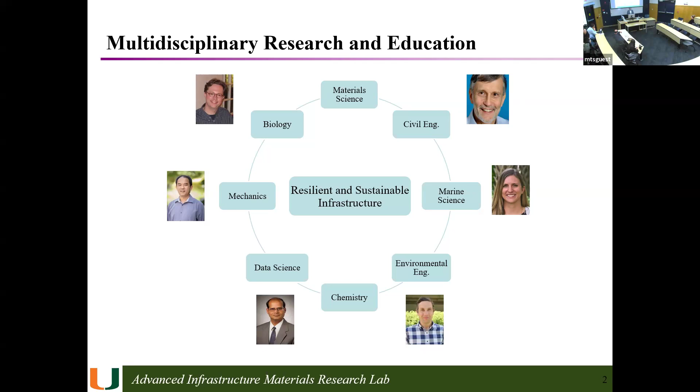So I collaborate with a wide range of folks. I am an engineer by training, but I collaborate with biology folks, mechanics, data sciences, chemistry, marine sciences, environmental sciences, and I believe that's the only way we can address the issue of resilience and sustainability in our infrastructure. Engineering is just one part of that equation. So we need to bring in marine scientists, biologists, environmental ecology, and different types of disciplines.

So in order to give an overview of what we do, the first research area for us is related to bio-inspired self-healing infrastructure materials. In particular, here we are looking at cement or concrete-based materials.

US infrastructure keeps getting a grade of D plus and C minus. Either one is horrible, right? C plus, C minus, D plus, so we need to do something about that. This is an example of a lot of problems that we have in our infrastructure. So we need to do something about that.

And one way we want to do that is to get inspiration from nature, because nature does things in a very interesting and optimal fashion.

To give you just one example, here you see an image of a sea urchin. This is a material consisting of calcium carbonate - limestone. Limestone is very brittle, but this creature is able to have very flexible spines, still made of limestone. You cannot think of limestone that you can bend - it cracks.

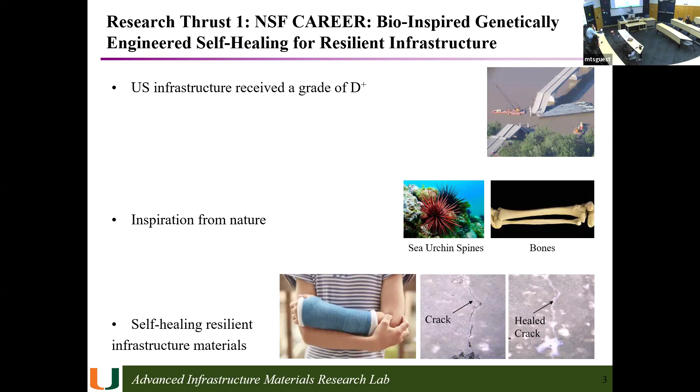Because you don't need to have traffic jams, you don't need to shut down highways to fix concrete. More importantly, whatever you can see to fix are only the cracks that you see on the surface. Most of the cracks are not on the surface, they are well within the material and you don't see them. So what happened up there was not an external crack that you would be able to see and fix, it was caused by an internal crack that you're not going to be able to see. But if you have a self-healing mechanism, you're able to heal the material and hopefully prevent disasters like that. So this self-healing is key to improving the resilience of our infrastructure.

The research thrust two has to do with combining data sciences and machine learning, and also bioinformatics, to improve the resilience and sustainability of our infrastructure materials. The idea here is to take some of the biomolecules that we find in nature and try to see how they can improve certain functionality. Sometimes you want to improve strength, sometimes resilience, sometimes other properties.

This scheme is a machine learning scheme, and I know everyone by now is familiar with machine learning, a new buzzword in this day and age. But this is something that pharmaceutical companies have been using for 30, 40 years. This is how they make new drug discoveries. They have a large data set of different biomolecules that they extract from nature. These are not lab synthesized biomolecules.

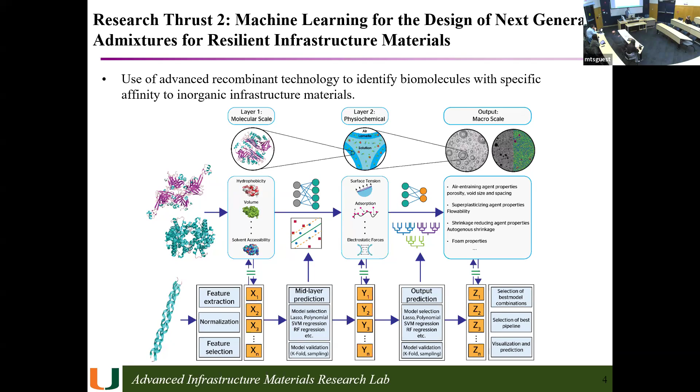These are all derived from nature. And they try to make connections between the molecular structure of these biomolecules and try to see if there is any correlation between the molecular structure and the property of these enhanced infrastructure materials. That's another research thrust my group is working on, and we have made some progress. There are a lot of challenges, and the major one is just the limited size of the data sets that we have. You cannot use machine learning if your data set is small. So we're working on that.

The third research thrust for us has to do with using more sustainable infrastructure materials. Construction processes and infrastructure materials are responsible for one third of the entire CO2 emissions, period. A lot of people do not know how damaging concrete infrastructure is for the environment. One third is huge, right? So we need to do something about that.

Producing 1 ton of cement, only cement, I'm not talking about concrete or other things, releases 1 ton of CO2 into the environment. It takes a lot of energy, it releases a lot of CO2. So we need to do something about that. Even if you can change only 5% of concrete somehow, that will translate into huge benefits because of the sheer volume of infrastructure material we use.

The estimates are that we will continue to use concrete in our infrastructure. There's no other way, you're going to use them. So what we are doing in my lab is to be able to use low carbon and green alternatives to concrete. Some of the alternative materials we are using are naturally occurring, for example calcium silicates that you can find in different locations from geological resources.

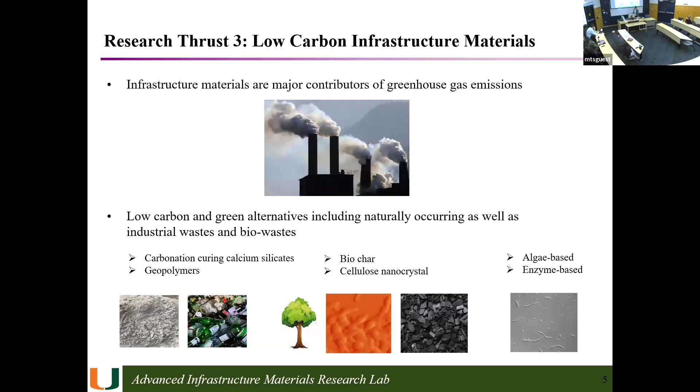Particularly, we are very interested in biochar because every day we see some new aspects of biochar that we haven't looked at before, and how it can benefit the infrastructure to improve the sustainability of our infrastructure.

So I sort of went over this, but just to go over it one more time: concrete, we've used that in a wide range of infrastructure. We use that in transportation systems, in buildings, in dams. We use that in our coastal infrastructure. We use that in our nuclear plants. We use that in marine structures. So it's basically everywhere. But one issue with concrete is that it is prone to crack. It cracks easily, so we need to find ways to improve its crack resistance.

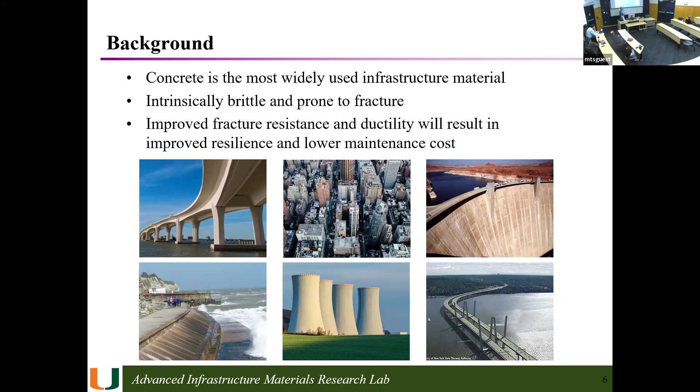Also, there are new technologies where 3D printing and other robotic applications are used to improve concrete construction. But in all these cases, structural integrity plays a very important role.

And also, there are some innovative ideas to use it as a battery, to use concrete as a battery, because in concrete you have a lot of ions. So it can, in theory, serve as a battery. There is some proof of concept work showing there is a possibility for that, but I think it is far away from implementation. In theory, though, it can be used as an energy storage medium. So if that could be a possibility, think of the benefits that it can provide. I don't know what might happen with the new administration, but in theory, this is the possibility.

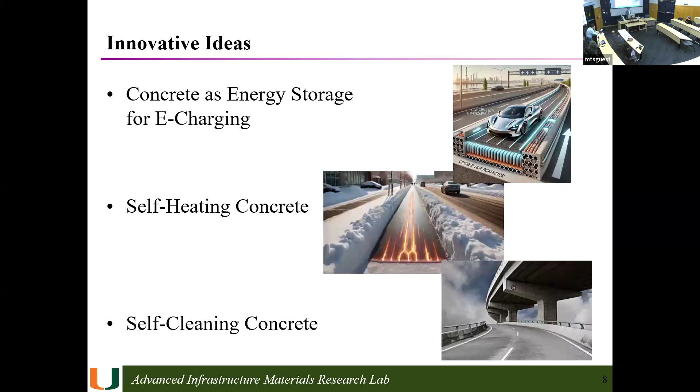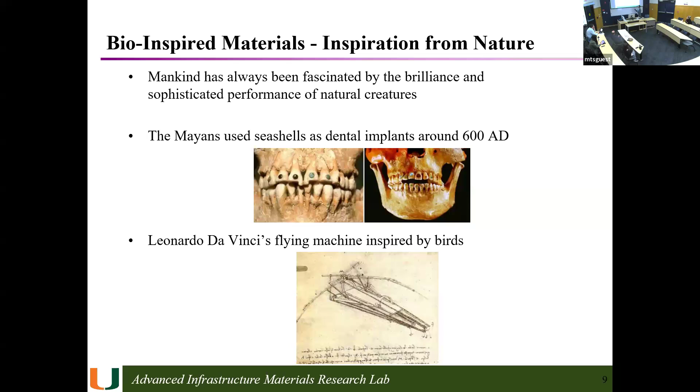So I talked about the bio-inspired approach, but this is not new. I didn't come up with bio-inspiration myself. Humans have always been fascinated by biology, by nature. Mayans used seashell as dental implants a long time ago. So there are some bio-inspired materials in our history, and Leonardo da Vinci's flying machine was inspired by birds.

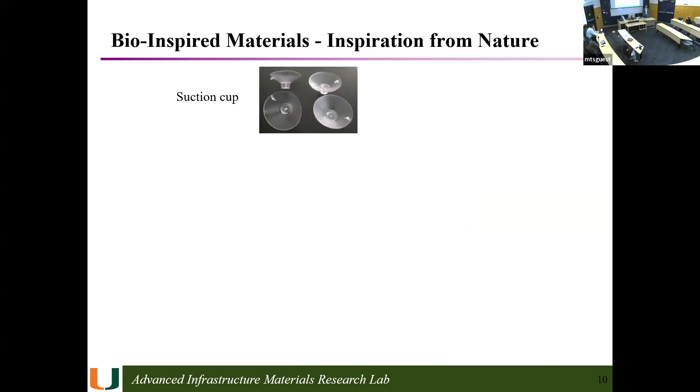What is this? A suction cup. We use that in many different applications. Do you know where the idea came from? Octopus, there you go. The idea came from someone looking at an octopus. It wasn't like one person decided, okay, next morning I'm gonna develop suction cups. No, you look at nature and see how interesting the octopus moves around. Look at the octopus cups and also the suction cup, you see a very close resemblance. So the idea comes from octopus.

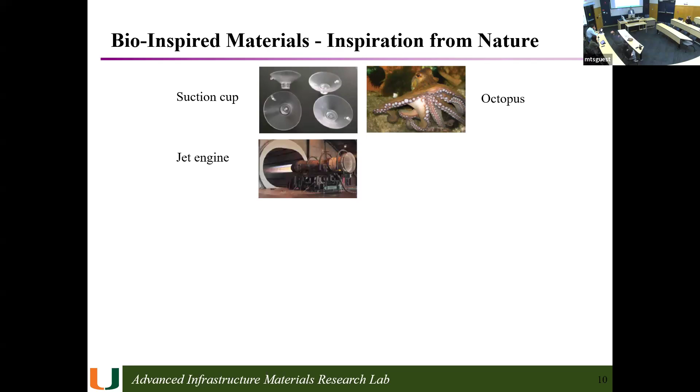So take the jet engine, for example, the way that a jellyfish moves around. People looked at that and were able to use it in the design of jet engines. Velcro, where do you think the idea comes from? Feathers.

The hook and eyes of feathers. Gecko? Seeds? No, walk across the grass - by the time you make it all the way, you'll see a lot attached to your clothes. Very good - from plants. So the idea comes from plants. Yeah, they're annoying, so you need to get them off. But Velcro, the idea comes from this - just looking at nature.

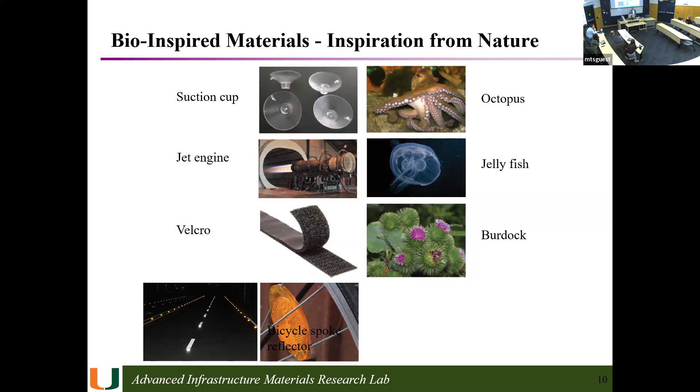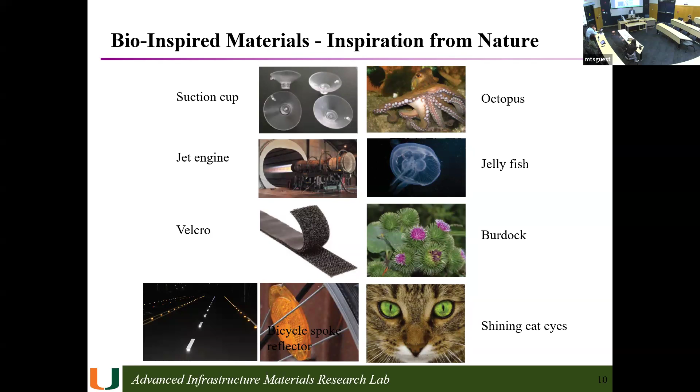So we use bio-inspiration in a wide range of applications. What I'm talking about here is not new, but I'm taking it into a new area - taking bio-inspired materials to develop hopefully more sustainable and resilient infrastructure materials. There are many examples, but just to give you a flavor and have some fun, I mentioned this before.

At the microstructure level, nacre consists of 95% highly brittle calcium carbonate, or limestone, and only 5% biomolecules - just a tiny amount. These biomolecules are able to manipulate the microstructure of the material, and that's how nacre is able to exhibit such high crack resistance, higher than steel and concrete. Obviously you need to compare mass by mass - you cannot compare different masses.

Another example I talked about earlier is the sea urchin - you can actually bend these spines. But calcium carbonate, limestone, is very brittle; you cannot bend it. Human bones are very, very tough. Your teeth are put under continuous abuse - you eat different things, chew hard, acidic, basic things. Yes, at some point you need to see a dentist, but teeth are very tough.

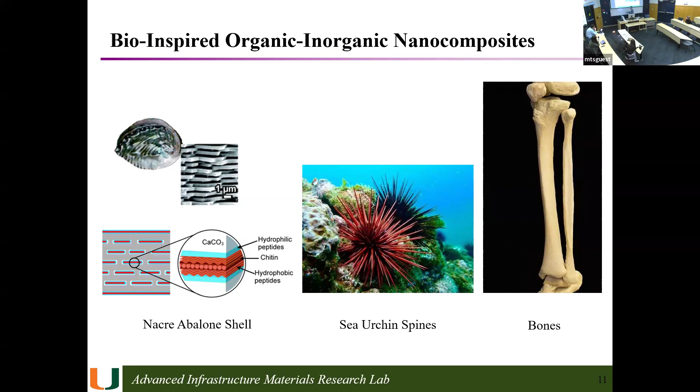This is because you have, again, a small amount of biomolecules in all these materials that are able to regulate and tune the properties of materials at the macro level. So our idea was to use these biomolecules to enhance properties in our infrastructure materials.

So we started using some amino acids. If you put them together in a linear fashion, you get peptides, and if you connect a bunch of peptides in different forms, you get proteins. Typically there are about 20 different amino acids in nature, so we decided to use different proteins that we could basically find.

Getting highly purified proteins is very expensive, so we tried to use some of the proteins we were able to get from biological waste. For example, some proteins we use are obtained from blood - hemoglobin - and we use proteins from milk and from eggs. So these are all derived from bio-waste, and in a sense, they're pretty cheap.

The self-healing idea we have is that we use certain enzymes obtained from soil, and we also provide urea and some nutrients that act as bacteria food. So we put biomolecules, certain bacteria, into concrete, and when a crack starts, they become activated and start precipitating the healing material, eventually completely filling the crack.

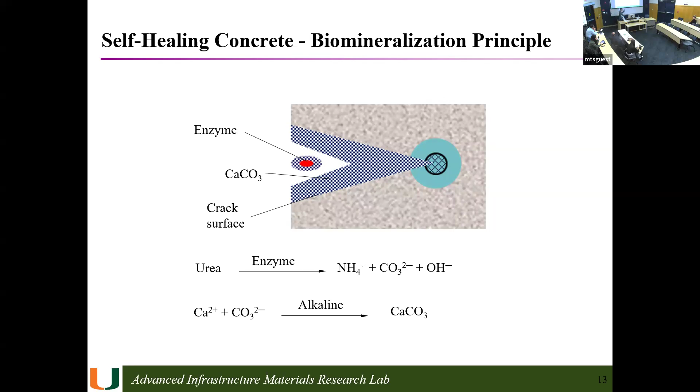So these are the proteins: lysozyme is derived from egg, albumin comes from cow milk or cow blood, and hemoglobin comes from human blood as well.

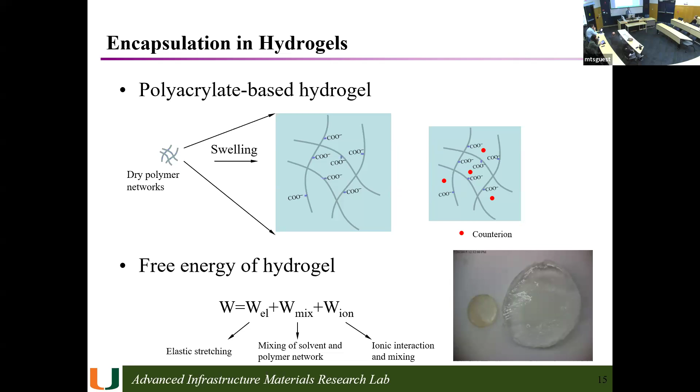So you cannot just add these things into concrete. You need to be able to encapsulate them in a certain gel. Here you use a hydrogel to encapsulate these materials, just like a capsule that you take. The capsule, the medicine that you take, the drug is not the capsule - the drug is the powder inside. The capsule just acts as a vehicle to take this into your body because you don't want that to be absorbed in your throat. You want it to go inside your body and get released where needed. So we use this to encapsulate.

This way you can improve the resilience. You don't need to worry about repairing, just healing. The ability to regain its property is the definition of resilience - it's able to regain its property after the crack occurs. So this is a self-healing infrastructure material.

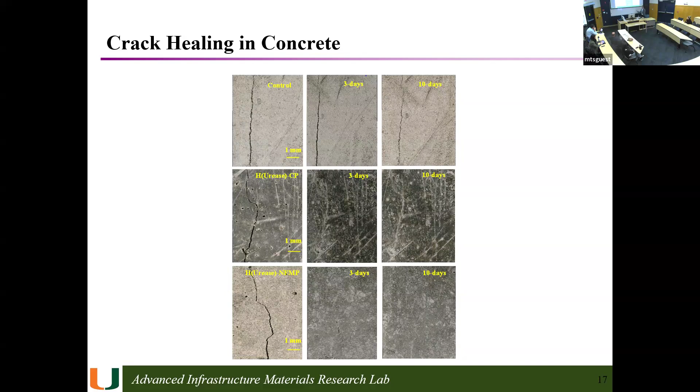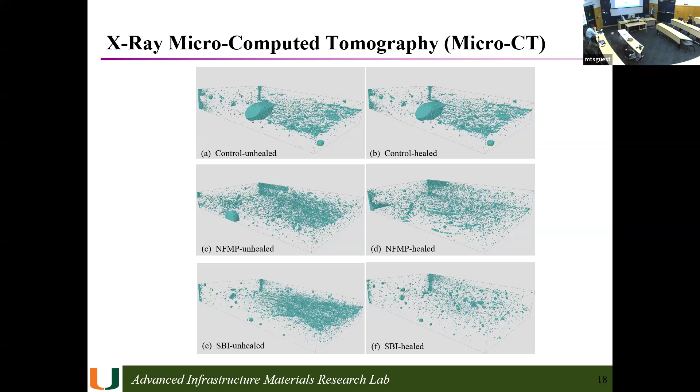We also have some fancy tools that show this better. Here we use micro CT analysis. A micro CT is just like the CT scan you get at a hospital - it provides the internal structure of different parts. This is a high energy CT scan that we use to look at the interior of materials. Our CT scan also confirmed that the cracks were filled.

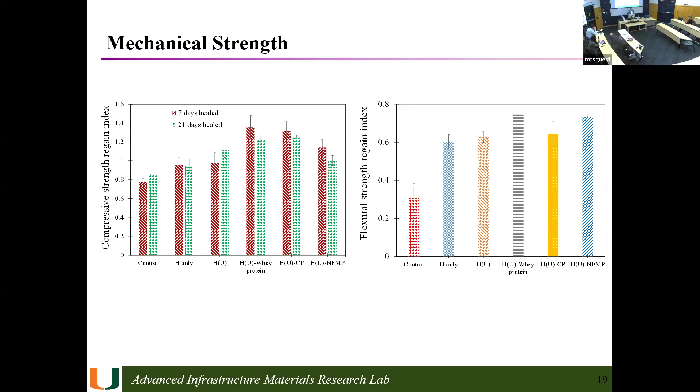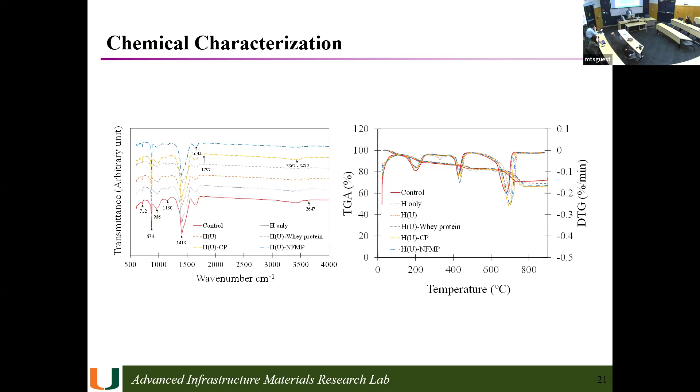Elemental analysis. Now I'm going to talk about some of the low carbon materials that we use in concrete. So the first thing I talked about had to do with self-healing; now I'm going to talk about some of the results we have in relation to low carbon sustainable materials.

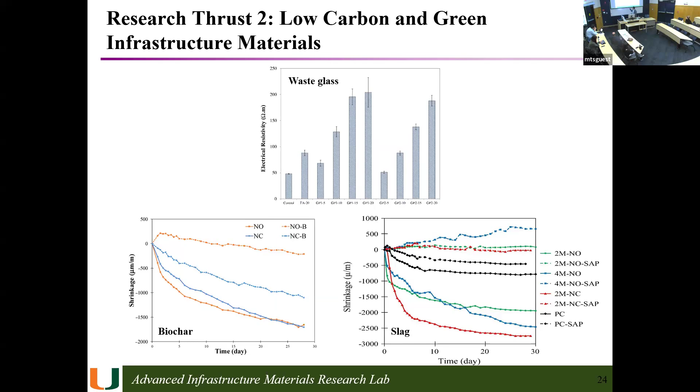When we use waste glass, we were able to show that it improves the durability of our infrastructure. Use of biochar improves the longevity of our infrastructure material and prevents cracking. Here we use slag, a byproduct of steel manufacturing. They produce a lot of slag that is just out there, and typically it gets dumped into landfills. But nowadays all our landfills are maxing out, so they don't have capacity to take more. So we use slag in cement - it's just a byproduct, a waste that you're able to recycle and reuse in concrete.

Another benefit we get from using concrete is as a carbon sequestration process - we capture CO2 that gets emitted into the environment, and this way we act as a carbon capture tool. The way it works is you have a reactant, in this case calcium silicate. You add CO2 to it, and what you get is a type of concrete - not traditional concrete, but one with very high durability and strength. This process is able to sequester a large volume of CO2.

So basically now we are turning a material that is highly polluting, highly energy intensive, into a material with much lower carbon footprint and one that is able to act as a carbon capture tool. What we hope we can do here is turn the tables, and help the environment and our infrastructure by using a material that is more sustainable. So it acts as a carbon sequestration material.

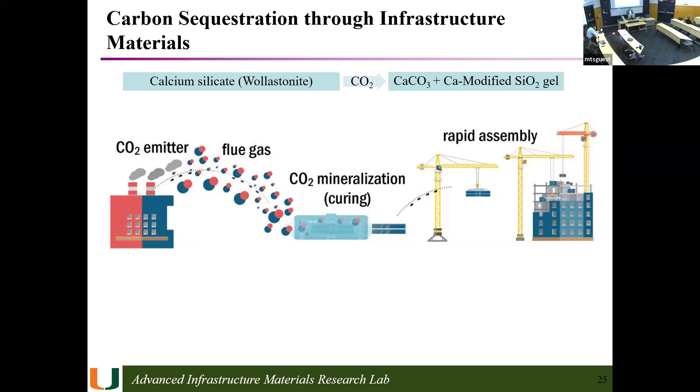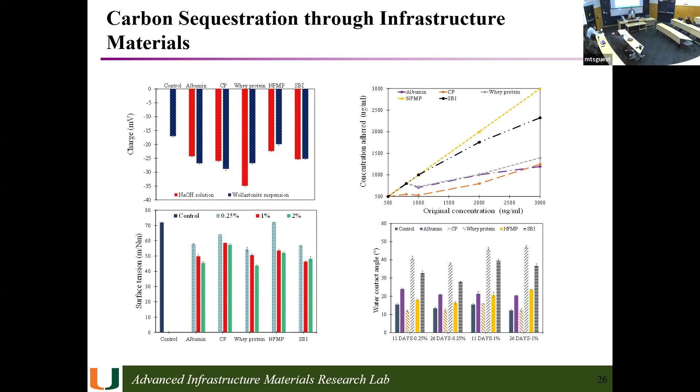Again, these are some of the details, the chemistry - I'm not going to bore you with that. We looked at different charges, the potential, their adsorption ability, the water contact, the hydrophobicity, and things like that. Some extraordinary processes, some microstructure analysis. To me, this is the most interesting slide. So we use some biomolecules in this process.

We were not planning on doing that, but we said, why not? Let's just see what happens.

SBI - so the first time we got this, I was very suspicious. This just cannot be, let's run it again. We ran it again, my PhD student ran this again, and then we got the same set of results.

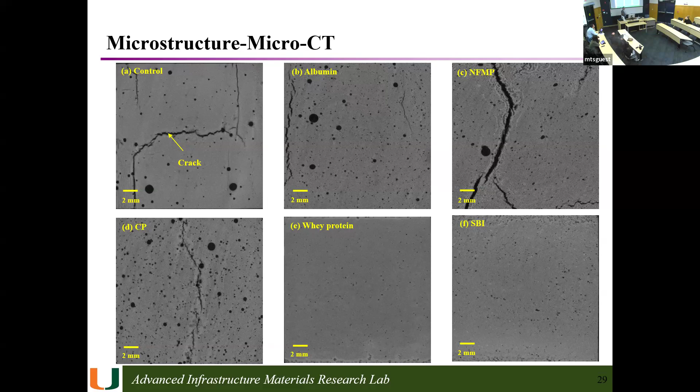Clearly, NFMP doesn't help. Fine, but at least these two show great benefits, so we can use them. So there is hope to use certain biomolecules to improve the resilience and durability of our infrastructure.

Now the third one is the fun one. It has to do with the use of machine learning, and I'm not going to get into the machine learning part of it, but we are working on a big project where we want to be able to predict and develop different biomolecules for different applications in concrete.

If you want to improve durability, we are trying to come up with a biomolecule that helps. If you want to increase other properties, we are going to come up with a new type. So this machine learning scheme allows us to do that.

So we tap into protein data banks that are available publicly. In medicine, they have been using it for a long time, so they have very large data banks. I don't know much about medicine, but I can tap into this large data set that they have.

And then we try to see how we can leverage the existing infrastructure and use machine learning to allow us to find different functionality in concrete. Now I'm going to talk about only one functionality. This is machine learning for different applications - you can tailor this, but today I'm going to talk about only one functionality.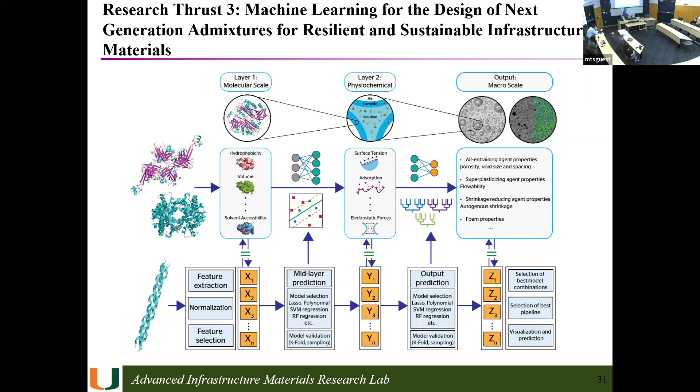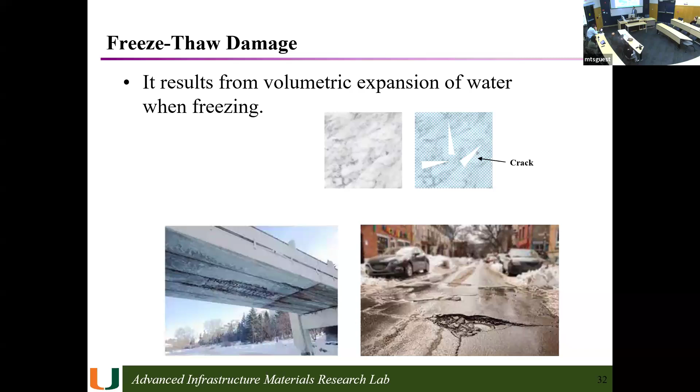You see a lot of potholes, right, on roads in our infrastructure, a lot of cracks. This happens because of freeze-thaw. When water freezes, it expands in volume, and at a certain point, boom, it puts pressure on the surrounding material and it pops, it cracks.

So one way to mitigate this is to introduce small micro-sized voids in the material. What these micron-sized voids do is act as a buffer. So when water freezes and wants to expand, they accommodate this expansion. If you don't have these micron-sized voids, there is no way for the expansion to go.

And the only way is just to crack, right? I want to expand, you have nothing for me to go, so I'm gonna crack it up. But if you put some tailored, engineered micron-sized voids, you allow them to go, and this way you diffuse the expansion and prevent cracking.

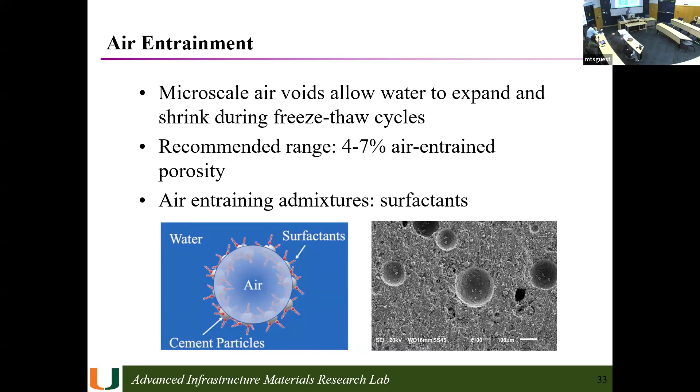Okay, what do you beat? To add the air, I know. What is it that you beat? Oh, eggs. Okay, if you whip water, do you get that?

What is it in the egg? Proteins. Okay, that's some sort of surfactant if that helps with the process. The proteins form foams, right? That's why you get this foamy structure. And depending on the ratio of eggs that you use, and also milk, there are proteins in the milk that help with the process of foaming. Depending on the ratio of the foam, the milk, the egg, the flour that you use, you get different textures, right? That's how a baker is able to do that. You change these proportions and you get different textures.

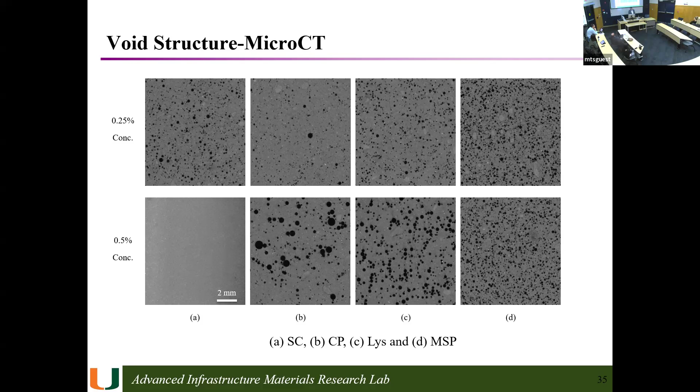So we also looked at the microstructure. I think that is not in the scope of interest today, just to look at the morphology at the micron level.

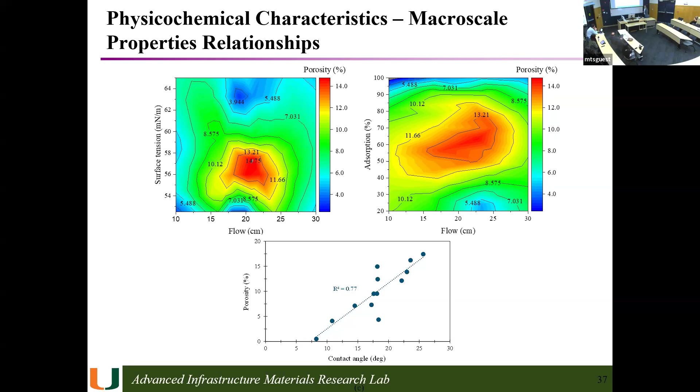And here are some machine learning results. We try to look at how physical and chemical properties of these biomolecules are related to the foam that they produce. So these are some of the maps that we were able to produce. And what we observed was that the contact angle, a measure of hydrophobicity of the proteins, has a clear correlation with the porosity in concrete.

So I'm going to stop here, and I'm going to acknowledge the funding agency that supported our research: NSF, DOT, and different other NASA agencies.

So if you like what you saw, all the credits go to my graduate and undergraduate students and postdocs. If you didn't like it, if you have problems with it, it's on me. I'm more than happy to talk to you about that, but I would like to thank them. They are the ones who did the work. I was in my lab just making sure things are on the right track.

We also do some community engagement to be able to attract more students into STEM. I always have this image, an old one, probably 9 or 8 years old. This student started as an elementary school student in my lab, and now he's finishing up his bachelor's and he's still doing research.

He started working in your lab in elementary school? Yes, look at him, not full time. Not full time, okay. And he was one of the best that I had. And then he's now finishing up, and he still works in my lab. So that's why I like this image. If I have one student that I can take from elementary school all the way to graduate, hopefully that's enough for me.

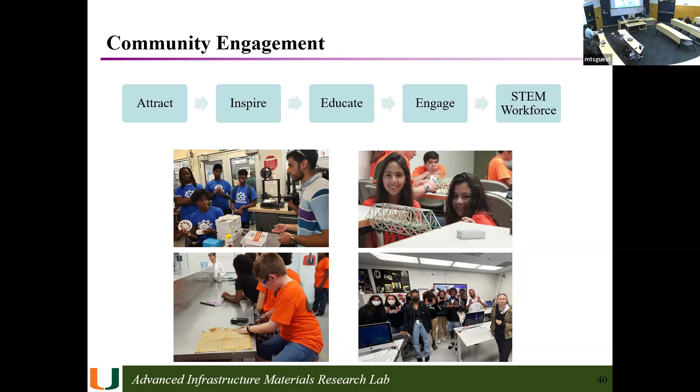That's good. And also the graduate, undergraduate, and collaborators, I want to acknowledge their work, references, and I'm more than happy to take any questions you might have.